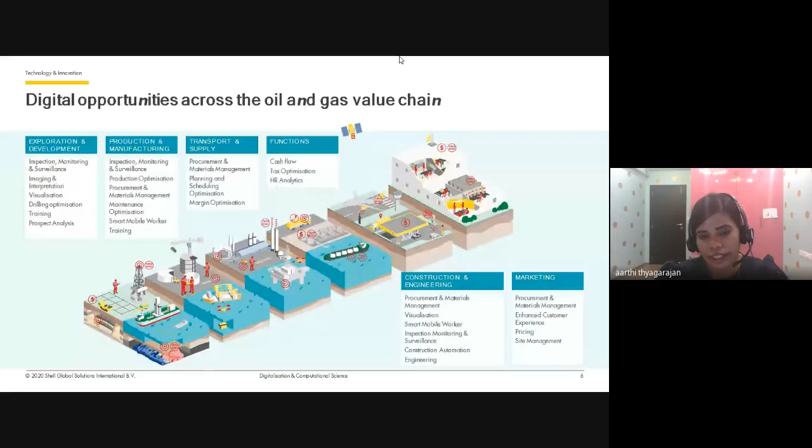Now let me tell you what we do more in the computational science space. Next slide, please. In Shell Technology Bangalore, we have a big team of computational science.

From predicting chemistry of catalysts and batteries to capturing flow through reactors, pipelines, and rocks, we develop fundamental physics and chemistry-based computations and advanced machine learning methods to deliver insights - that's number one - and solutions to the Shell businesses, that's the second.

A specific team in that is called the Scientific Image Analysis Team, which specializes in applying advanced computational methods to derive augmented insights from technical images and technical data. Here we combine the best of two worlds - data and physics-based models. We collaborate with a variety of researchers in Shell across all domains such as catalyst, petrophysics, and corrosion.

Besides extracting value from scientific images and data, we also develop fluid flow simulators for porous media such as reservoir rocks. Going ahead, I'll deep dive into several examples where we have successfully applied augmented intelligence for asset integrity.

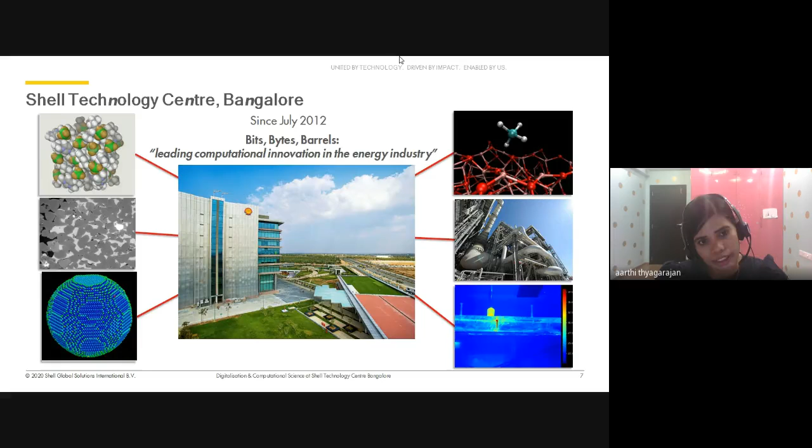Despite our geographical distances and our differences in domain knowledge, we have been able to come together and talk about what problems we would like to solve for Shell, and hence add value for Shell. So it's all about the ability to work with people, navigate through problems, and work in the solution mode, and that helps us bring up a lot of successes in Shell.

Next slide, please. This project is an example where in 2016 and 17, some of the specialized heat exchangers, also called syngas effluent cooler, or SEC coils, in Shell's gasification process unit, also known as SGP, suffered severe damages at many locations. Root cause analysis was performed in research labs to identify the problem and mitigation measures. In the plant, out of 36 SEC coils, two were inspected every quarter with microscopy image analysis, which is a destructive method, and both samples were used.

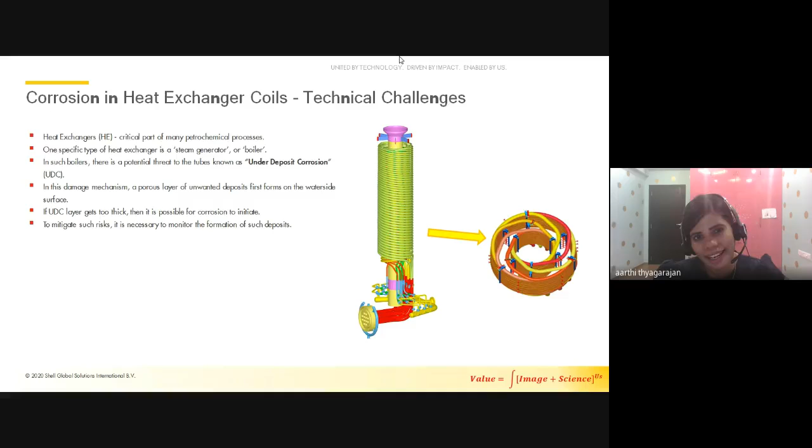Next slide, please. So historically, there are three different types of under-deposit corrosion that have affected the evaporator tubes in high pressure steam generators: caustic gouging, acid phosphate corrosion, and chloride-driven under-deposit corrosion. The primary cause of this UDC mechanism is related to the deposition of porous layers of magnetite particles on the water side, or water surface, of the evaporator tubes.

The magnetite particles are typically generated by what is called flow-assisted corrosion, elsewhere in the system—it could be in the feed water piping or in the economizer, it can be anywhere. They then get transported into the steam generator where they deposit onto the heat transfer surfaces. Beneath this layer, a process called wick boiling leads to a very high concentration of any ionic species present in the steam generator water.

As the deposit becomes thicker, the degree of concentration beneath the deposit increases and can reach factors as high as 10,000 times the bulk concentration. At some point, the concentration reaches a critical threshold level and causes the initiation of what we call under-deposit corrosion.

Now, depending upon the initial composition of the steam generator water, this may be of the three types mentioned above. In this project, we were primarily concerned with the chloride-driven mechanism. This is because of several factors that have conspired over the last 20 or 30 years to make this an increasingly prevalent failure mode, namely the drive for high performance.

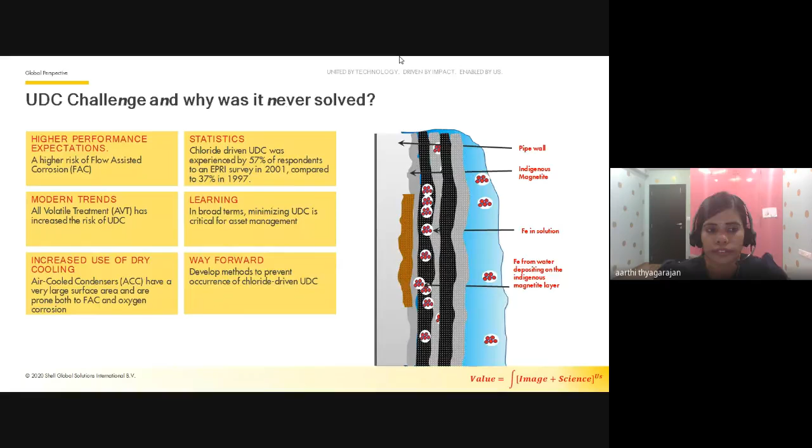So this is a workflow of the entire project. As we said, this project is aimed at deployment of this layer estimation via image analysis tool for estimating corrosion from digital images of corroded heat exchangers from our asset. And this is a plant called Pearl GTL where we convert natural gas, which is predominantly methane, into what we call usable fuels for our automobiles.

Before quantifying the number of layers and the layer thickness, etc., what we do is we separate each layer based on some shared characteristics, and this characteristic is the pixel intensity in combination with color spaces such as RGB and HSV, hue, saturation, etc. So the entire process flow is shown here.

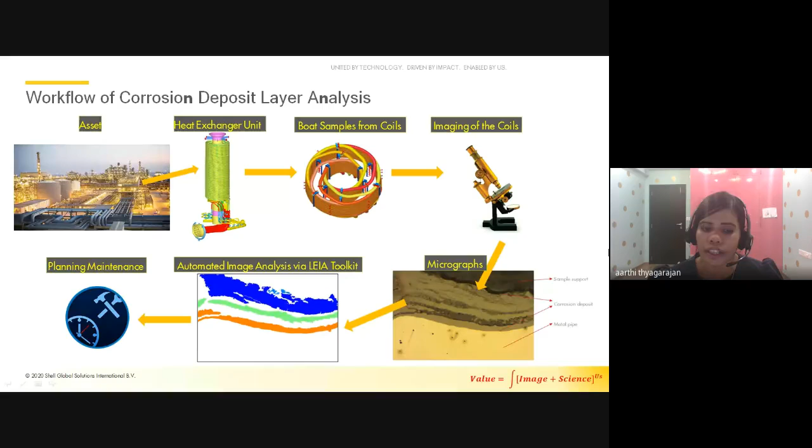It's a very big plant, at least equivalent to 7 or 8 Olympic field sized. This SEC coil that you see in the second picture in this workflow is a few meters in height. They're so big. Out of these coils, we take boat samples, and from the boat samples, we try to come up with strategies for automatically classifying whether it's the time to clean and prevent any leakage from happening. Because if we don't clean, the critical thickness will be crossed over, and the coil will start leaking because of what I explained, the wick boiling effect.

However, it has a drawback: the prior knowledge of the number of clusters needed. We do have SEM images where we have more than 4 or 5 number of regions, or the number of clusters are different. Therefore, we came up with an approach called incremental clustering algorithm. It's a more general technique to segment images, and it adopts a version of the k-means method. It was quite successful in thin sections of rocks, but we realized that we could also use this for these SEM images. And what it broadly does is pre-processing, feature extraction, clustering, and corrections.

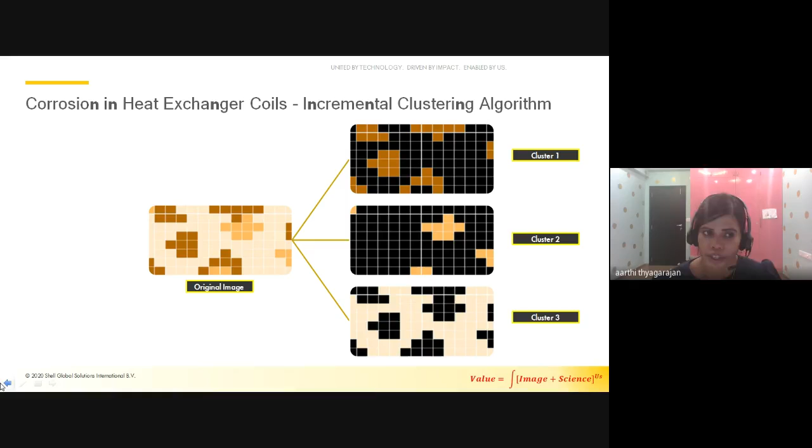Next slide, please. After the successful application of this method, what you see here is an output graph which shows the statistics of the layer. What I'm not showing is how we use this information in calculating the kinetics, the critical thickness, and the maintenance frequency that is proprietary to Shell.

However, so far whatever I shared gives you the background information or the fundamental approach of calculating the critical thickness and warning the plant by combining this information with the physics-based model, and hence help us in finding out, out of the 36 SEC coils, when coil number 1 is going to fail, when coil number 2 is going to fail, etc.

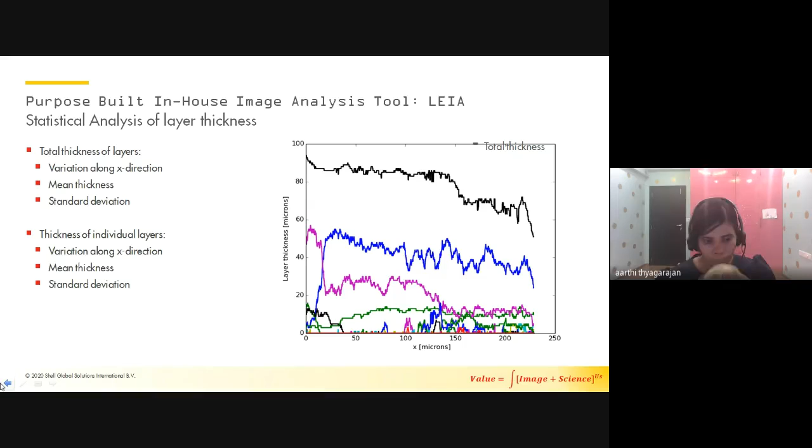So with that, I will move on to the next topic, and the next topic is much bigger than this. Again, it's a big collaboration with various people in Shell - with corrosion domain people, process engineers, asset integrity and pressure equipment integrity management expertise, and also IT folks.

Because in both these cases, it's not the research code that we deliver to our internal customers - it's actually the end user friendly product. In that context, I'll explain a few technical areas within this second project, and also explain how we move from research code that works just on our laptop to end user friendly products.

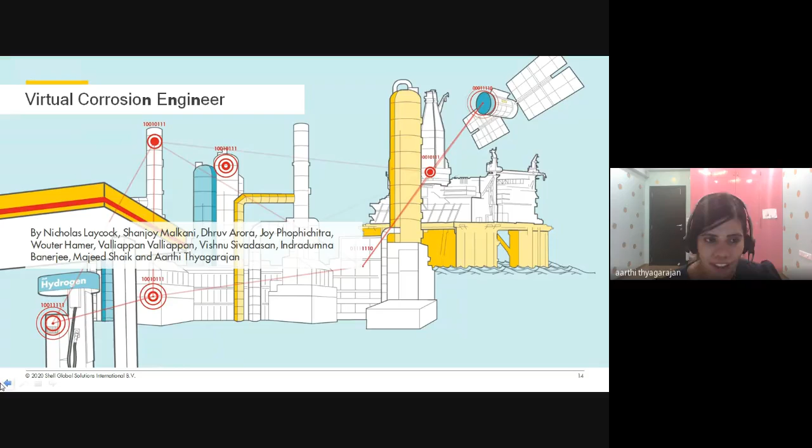Next slide please. I'm going to briefly narrate about our digital product aimed at reducing asset downtime and improving efficiency. It's called Virtual Corrosion Engineer, in short VCE. Please allow me to take an analogy familiar to us.

We all have heard about autopilots in our flights. The autopilot system relies on a series of flight conditions and weather conditions. This data gets ingested into the computer, gets combined with the models, and the computer software then makes the necessary changes to the flight path.

In the assets, the unknown events that hit our asset - and an asset is nothing but the entire campus, to put in layman terms, which converts a raw material into a usable product and makes profit for Shell, and also leads to responsible and cleaner energy for the world.

Now, what happens in these assets? Many of the equipments are designed for 30 years of lifetime, but then unfortunately they are hit by unknown events. So in these assets, the unknown events that hit our asset due to the operating conditions are exactly like these unpredictable weather conditions in an aircraft.

And these are known unknowns because we have the expert knowledge of these events, but we did not know how to find where they are going to occur in future, which equipment in our energy assets is more severely affected, etc. And when an event occurs, we do the root cause analysis, but we were never able to use that knowledge to prevent the same type of event in future.

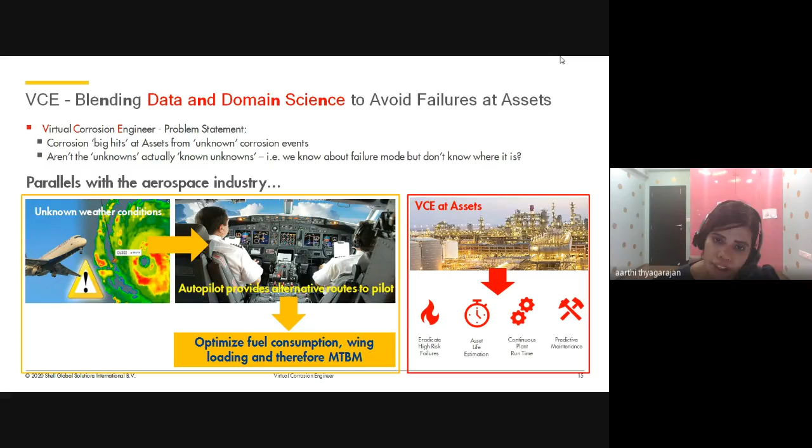This is where this Virtual Corrosion Engineer, in short VCE, comes in. Here we have predicted upcoming events by fusing engineering science models with the asset operation data, an augmented intelligence way of solving the problem. So what we have successfully applied here is nothing but a learner mindset - we have taken this working philosophy from the autopilot system to VCE for asset operations.

The motto behind VCE is to predict all the time, everywhere in the plant or asset, and for all the mechanisms, all the known damage mechanisms in the asset. And now, what does that mean for the asset?

So if you think in perspective of how it is useful for the asset, by doing this type of work, we are reducing the unplanned downtime. To give some perspective, the average financial loss per annum is several million dollars in such assets due to this unplanned downtime. Now, addressing how we are delivering this approach and preventing this unplanned downtime, it's not only technical.

This is where our great collaboration among Shell Technology Center Amsterdam, computational scientists and material corrosion engineers from Shell Technology Bangalore, technical authorities from Shell Houston and Qatar Shell including Qatar Shell Research Center, and the IT engineers from SBO Bangalore, data science team from SBO Chennai, thus spanning across multiple organizations and businesses within Shell.

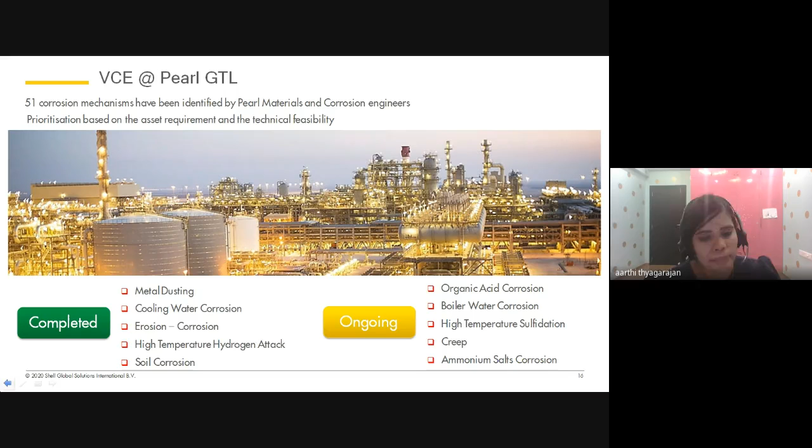As a tangible delivery for business, we saved this year several millions of dollars for one of the Shell assets. Next slide, please.

So this is an example called open recirculating cooling water, the picture that you see. In each asset, there are about a few hundred to thousands of such equipment, so-called heat exchangers. As a chemical engineer, many of you would know it better than me - heat exchangers can in turn contain tens and thousands of tubes, and the majority of which are fabricated from carbon steel.

The failure of such tubes by corrosion is a common cause of unexpected plant downtime and lost production. As we know, something around 60% of carbon steel tubes in cooling water service will fail well before reaching their design life. The three most likely corrosion mechanisms in these exchangers are microbially induced corrosion, in short called MIC, erosion corrosion, and under deposit corrosion.

The probability of occurrence for each mechanism is obviously affected by the quality of water treatment, but also by the operational conditions. Moreover, in most of the Shell assets, it is considered to have the water chemistry managed fairly well. So hence we got a lot of clue on how the operational conditions could affect this, and to differentiate between the exchangers and identify those exchangers that are at high risk of failure.

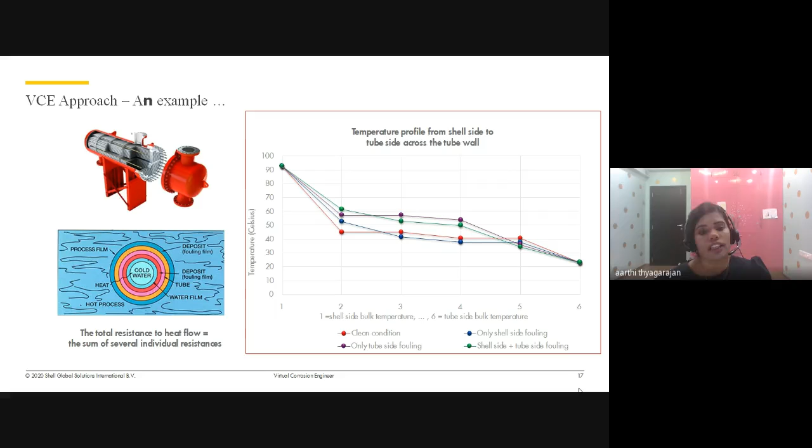So basically in VCE we converted all the unknown heat exchangers into known heat exchangers, where we were able to pinpoint and say this one is failing more than the other, and we were able to give the ranking for the process called SRBI, shell risk based inspection, in short, to prioritize the exchangers for inspection and replacement.

Next slide, please. In the interest of time, I'll skip these slides.

What we show here is nothing but the basic heat transfer fundamentals that we have used. Basically we calculate the velocities, the heat transfer coefficient, fouling factor, and we calculate the tube skin temperature, and based on the calculation of tube skin temperature and the knowledge of the equipment.

We know the limits for each equipment, so we can calculate the exceedance on a live basis, and knowing the historical exceedance and the live exceedance, we can calculate the cumulative exceedance, and then correlate it with respect to the corrosion rate based on the inspected heat exchangers, and based on the correlation further calculate the corrosion rates for the unknown heat exchangers. So that's the summary of how we applied this augmented intelligence for the VCE.

Sorry, for the heat exchangers in VCE. Now, next slide, please.

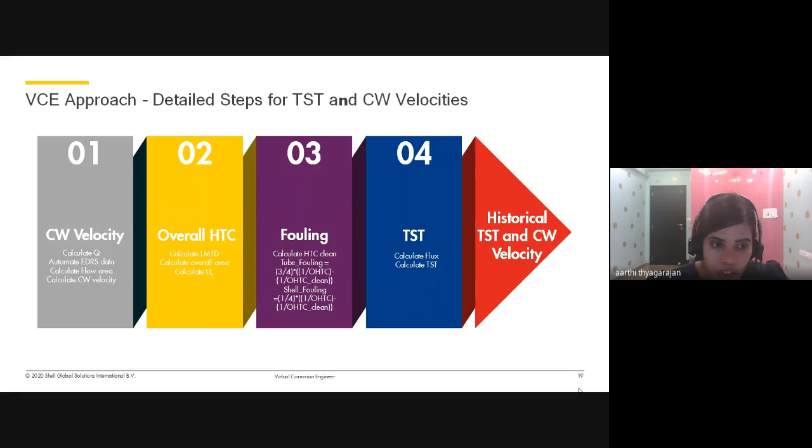For example, select which one needs to be upgraded, in the sense they need to be upgraded in terms of material from a simple carbon steel to bespoke material of choice. Some of them needed only a repair, some of them needed a replacement but to the same material, and some of them did not require any attention, and hence we were able to defer the cost of replacement, or we were basically able to directly add bottom line value to the business.

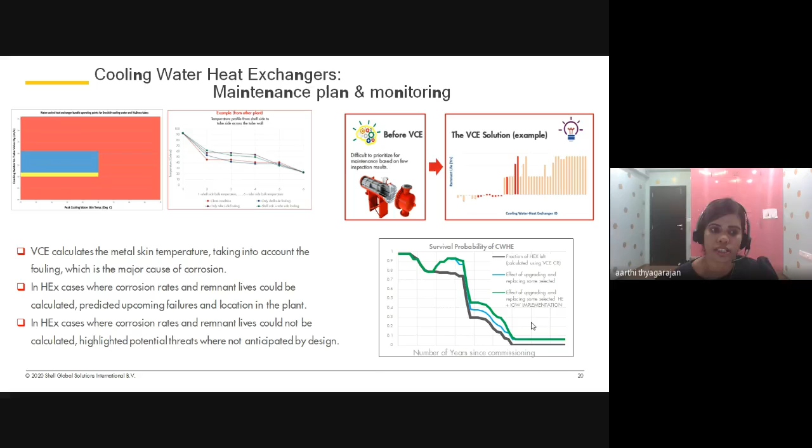Now, fundamentally, the deposition of carbon on and within the affected metals and alloys is accompanied by what you call disintegration of the substrate, and this disintegration will cause wall loss in industrial equipment and ultimately lead to failure of stressed components.

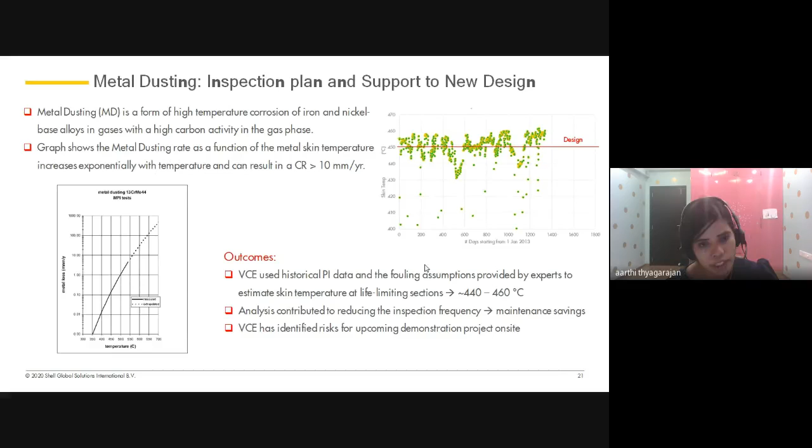Mechanistic understanding behind the degradation of the metal. We found out the cause of the degradation, and we were able to convert that into physics-based models, combine that with the design and operational data, and prevent further loss, and prevent too frequent inspection strategies. We were able to basically optimize the inspection strategy for these types of specialized heat exchangers.

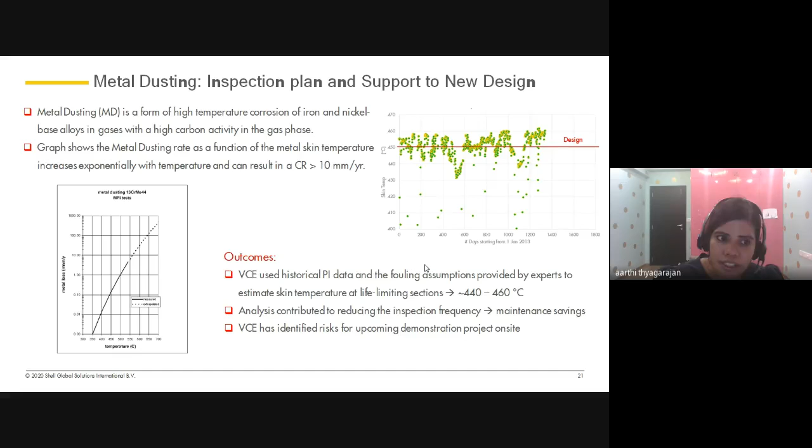Hence, we were able to prove the cost leadership coming out of the technical work. So it's the ability to work with people, and also the ability to show the cost leadership aspect. Next slide, please.

This is a mechanism called HTHA in short, otherwise known as high temperature hydrogen attack. It's a degradation of mechanical properties of steel by high temperature reaction of absorbed hydrogen. Please note it's absorbed, meaning it's a volumetric absorption with carbon in the steel.

So how do they react with each other? At elevated temperature, some of the molecular hydrogen in the process environment dissociates into atomic hydrogen, which can diffuse into the steel. Now this HTHA, high temperature hydrogen attack of steel, can result in surface decarburization, internal decarburization, fissuring, and cracking.

Basically it affects the granular properties of the material, or some combination of all these factors. This mechanism called HTHA has been encountered mainly in carbon steels, with and without what we call post weld heat treatment, because after this weld heat treatment, the material structure of the carbon steel becomes slightly toughened and hence less amenable to HTHA. But if it's not post weld heat treated, it is highly susceptible to these kinds of attacks.

Now, HTHA is challenging to inspect because it's not something that happens every day in our asset life, and it is very catastrophic. So it's good that it doesn't happen often, but even though it is a rare event, there is a lot of industrial data around this. That's where the collaborative consortium among many industries, including Shell, has helped.

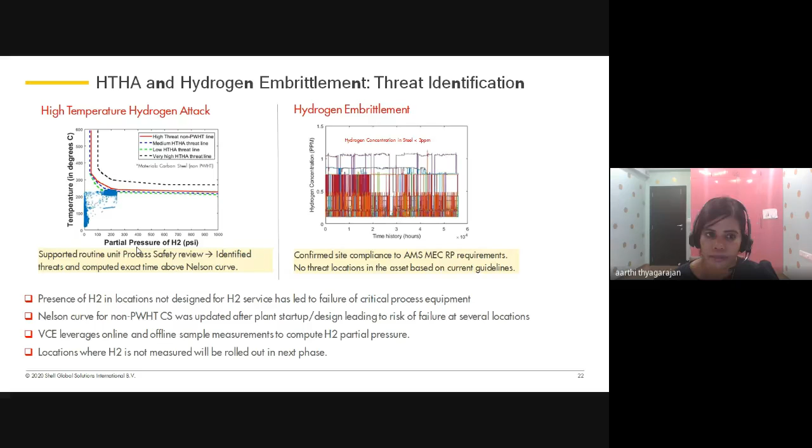We applied the same logic called the cumulative exceedance factor, and based on our sensor data, showed which locations are more prone to HTHA attack than others. Here it's not about 95% or 98% accuracy of results. It's about the ranking, which otherwise was completely impossible to do. We were able to rank and show the assets that some of their locations are not safe, and hence appropriate preventive steps were taken.

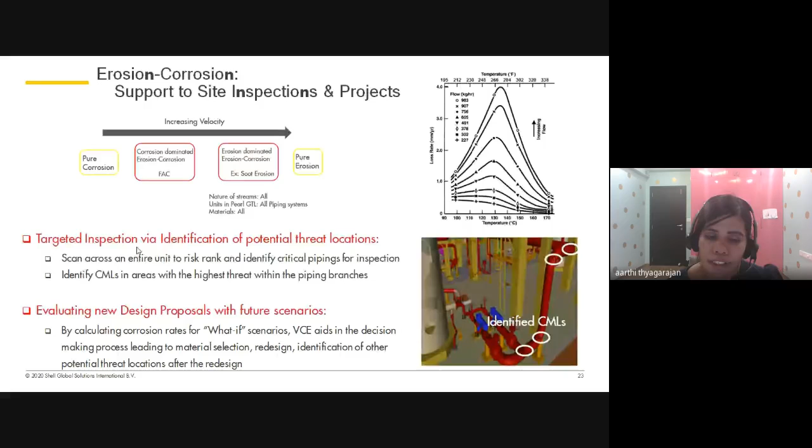It's always about what knowledge and what information doesn't exist, and where we can add value by combining the models with the data. That has been our important focus, so that we can really help these assets.

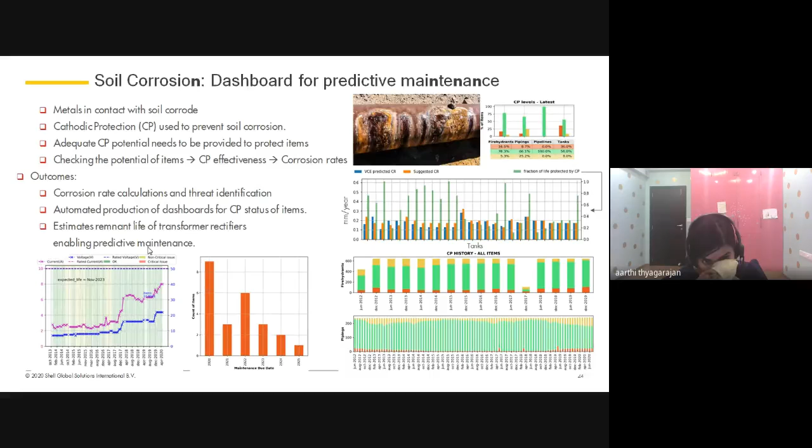Additionally, we took advantage of the wealth of information extracted, and it became possible to predict a maintenance schedule due date for several transformer rectifiers, which provide the necessary current for protection against soil corrosion. So what we essentially did was help the asset make the case for replacing or maintaining these transformer rectifiers in time, thereby mitigating unexpected failures and associated lack of protection.

Not only that, we came up with proper dashboard systems and visualizations. It's used on a monthly basis to trigger automated emails to customers and prevent unexpected failure from happening. So starting from a simple fundamental computational model, combining that with data, we talked about helping engineers in the asset or field receive automated warnings, with the dashboard showing what is going fine and what is not, by tracking the protection levels.

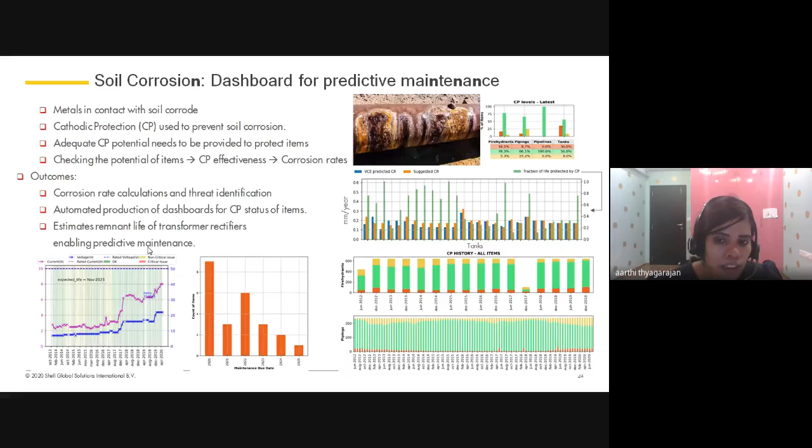So this is an example, and that's a good segue for the next slide, on how we convert our research codes into what we call end-user friendly tools. Whatever runs on our laptop isn't automatically going to continuously run and predict failures. We have to convert these codes into robust, highly scalable solutions so that they not only run automatically and continuously, but also provide the right strategies.

From the IT perspective, for example, if you go on Google today about a coronavirus dashboard—corrosion and coronavirus are analogous—there's a very nice web-based dashboard from Johns Hopkins University. They've nicely come up with a strategy of showing both the live status and the cumulative status of COVID across the entire world, breaking it into continents, countries, states, cities, and further down the line. Similarly, if you take an asset, it has several areas.

Within each area there are several units, and within a unit there are several corrosion loops, which are a physical attribute—you can combine a few pieces of equipment in a unit into one corrosion loop based on their damage mechanisms, for example. So we've come up with a similar strategy for showing, in a live manner, the status of the entire plant for various damage mechanisms, five or six of which were presented in this talk.

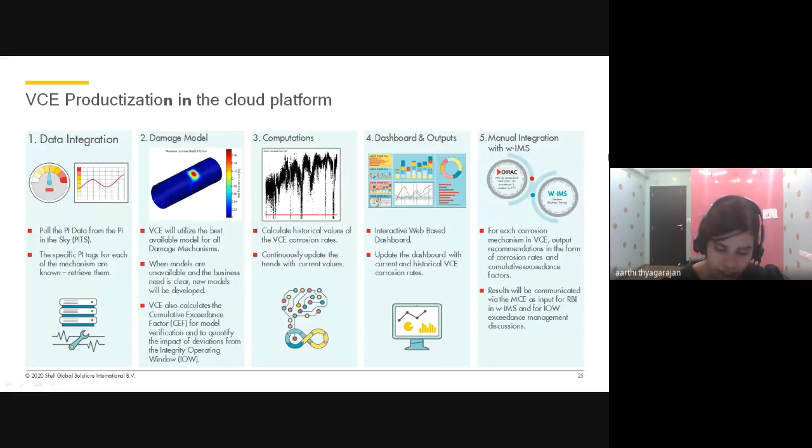Technical authorities are involved in approving new inspection data uploads, and whenever inspection data is updated, the model correlation or validation has to be updated in an automated way—though it does involve semi-automation, because technical authority 1 or 2 approval is necessary. Basically, our research codes have been converted into an end-user friendly tool, embedding the work process that conforms to current industry standards at actual assets.

I think with that, I'd like to stop and skip the third topic in the interest of answering questions and making sure it's useful for the students. I'm open to questions now. Thank you.